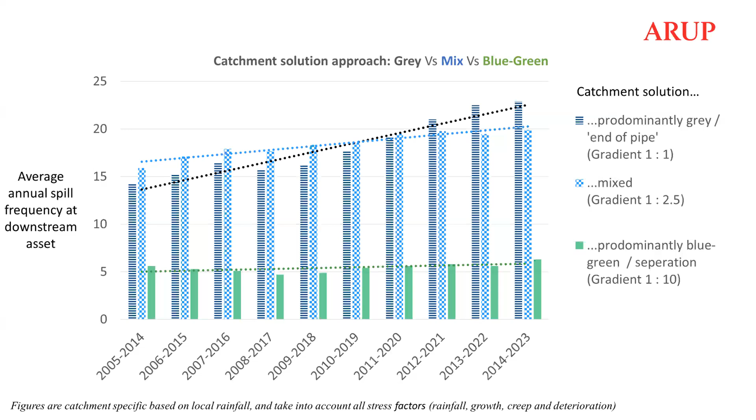The first is maintenance. It's currently incredibly difficult for local authorities to retain funding for maintenance with significant other pressures on public spending. In Grangetown, maintenance has not been routine. In fact, to my knowledge, there's been just one maintenance activity in the past 6 years. I do see the positive on the one hand, as it's performing very well. And the community has stepped up as well, as I discussed with some of you today, and they're actually helping to maintain some of the green features, which is a massive positive. Perhaps going forward, we need to consider other options for maintenance. This might include things like private finance, private nature finance, and also getting the community involved as well. And the CIRIA tool might help in backing this approach up.

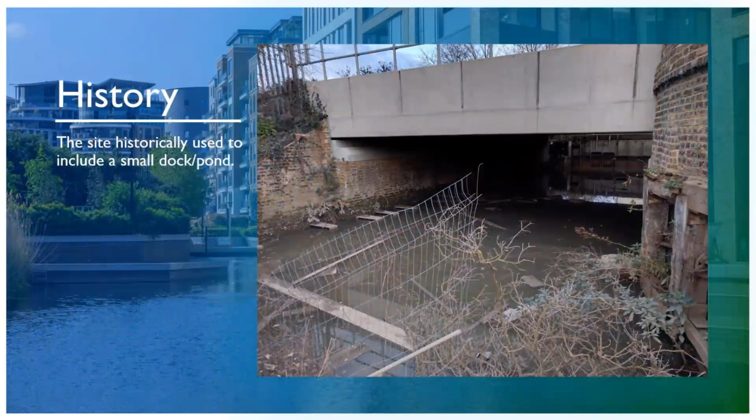Our vision for Chelsea Creek was to connect the site to water by expanding the dock and providing canals to create a vibrant new waterside destination. Looking to Amsterdam and Copenhagen, we have brought a characteristically European feel of waterside living to London. Historically, the northern corner of the site used to include a small pond. This has been extended into a larger basin and marina with 2 canals running from it.

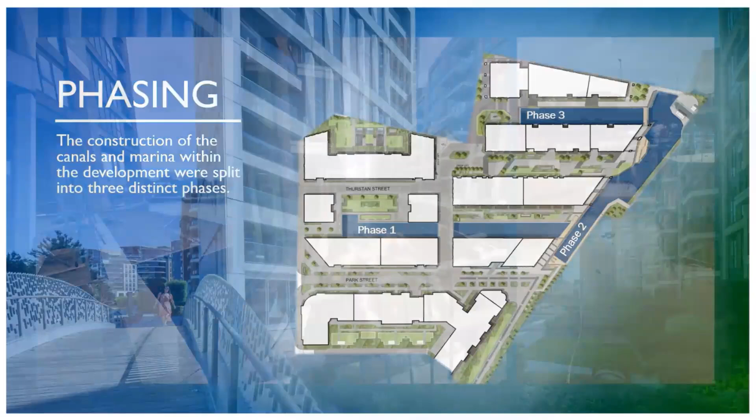The construction of the canals and marina within the new development was split into 3 distinct phases. These new features were constructed as a continuous concrete structure. In order to not place pressure on the local network, the canal has also been designed and constructed to act as an attenuation tank holding stormwater. In addition to this, the feature also serves as a place for nature and community to thrive.

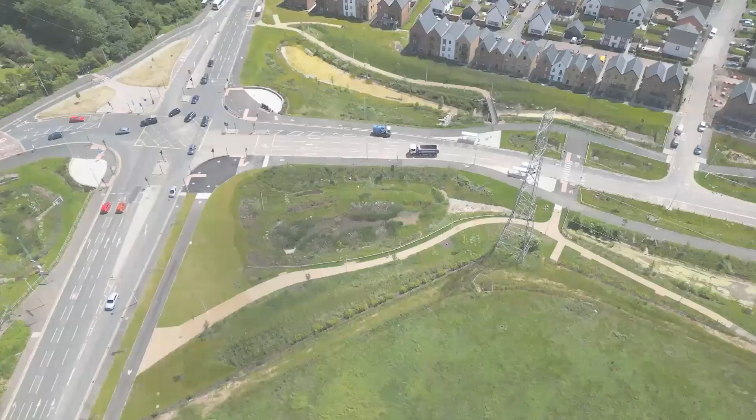Plasdŵr's Gateway Linear Park is an active travel, landscaping and sustainable drainage focused highway link into Wales's largest residential development. The wider Plasdŵr site will provide 7,000 homes, 5 schools, amenities and 400 acres of green spaces over the next few decades. The Gateway Linear Park is a landmark entrance into that development, designed to capture the ethos and design principles of this 21st century garden city.

Working collaboratively from the outset, the project aimed to combine safe active travel with the desire to create a destination and the need to sustainably manage surface water runoff. These principles were at the forefront of the design, a stark contrast to the traditional car-centric, narrow footpath, hard-engineered highways of the past. The design was also carefully coordinated with existing strategic utilities, including high-voltage cabling, a trunk potable water main, and a high-pressure gas main.

Surface water runoff is collected in swales with check dams to slow the water down, allowing sediment to settle, and carefully selected planting to strip hydrocarbons and metals from the polluted runoff. Runoff is then attenuated in landscape ponds, reducing flood risk within the development and in the downstream drainage network.

The SuDS components are closely integrated with footpaths, cycle routes and play equipment, as well as providing a natural separation from car traffic, improving safety and experience.

The project introduced 140 trees, 2,400 metres squared of permanent water, varied aquatic and non-aquatic planting, and large amounts of wildflower meadow planting. Biodiversity benefits can be seen firsthand with the new species already present on site, including nesting birds and invertebrates. 70% of Gateway Linear Park is blue and green landscaping, a completely different approach to traditional highway design.

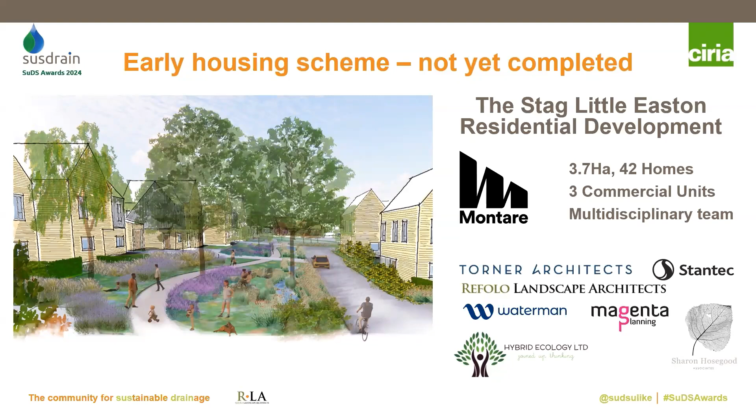Right from the start, the client engaged a multidisciplinary team including Torner Architects, Magenta Planning, Stantec as drainage engineers, Hybrid Ecology, Waterman as highway engineers, Sharon Hosegood Associates as arboriculturalists, and ourselves as landscape architects. Utilising a multidisciplinary approach guarantees that the design harmoniously blends in with its surroundings.

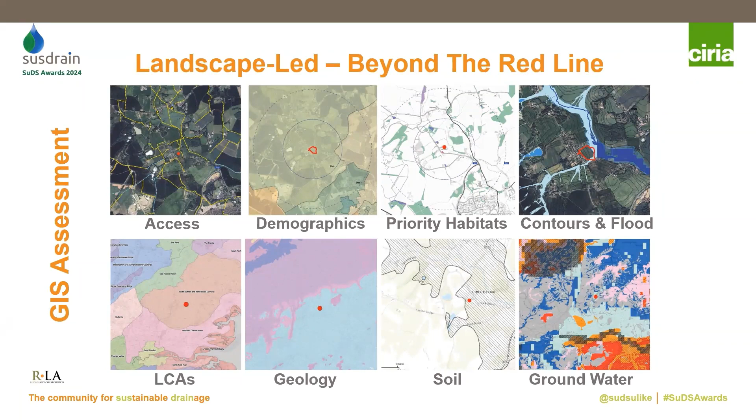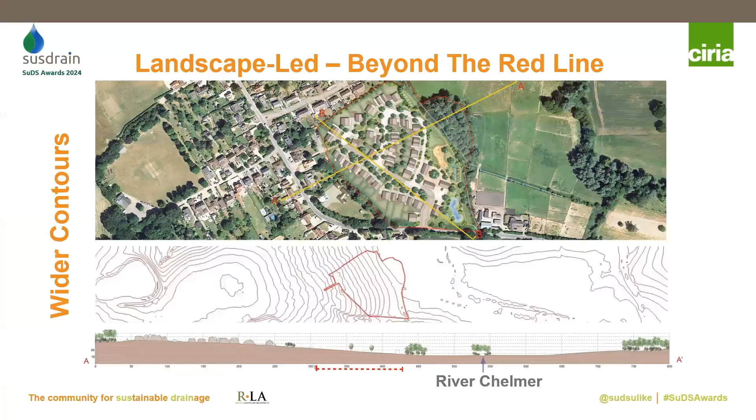By applying that wider landscape approach, the initial assessment of the scheme consists of a desktop GIS analysis where key aspects of the site within and beyond the red boundary were captured and overlaid. This provided the initial design input for the scheme. Wider land contours assessment and long site sections provided key information in relation to the surrounding hydrology and the River Chelmer and other relevant water features.

The design within the site boundary then evolved, taking into consideration the land aspects as well as the complex architectural requirements for the homes. Through various interdisciplinary design iterations, the green and blue infrastructure was seamlessly integrated with the social infrastructure and architectural ethos for the scheme, creating a place for people and wildlife to call home.

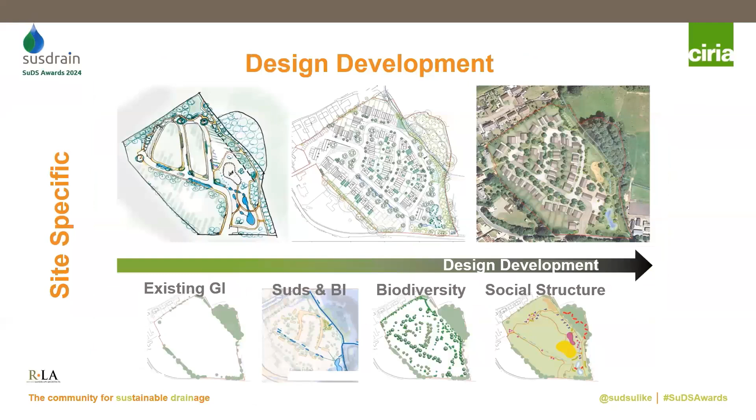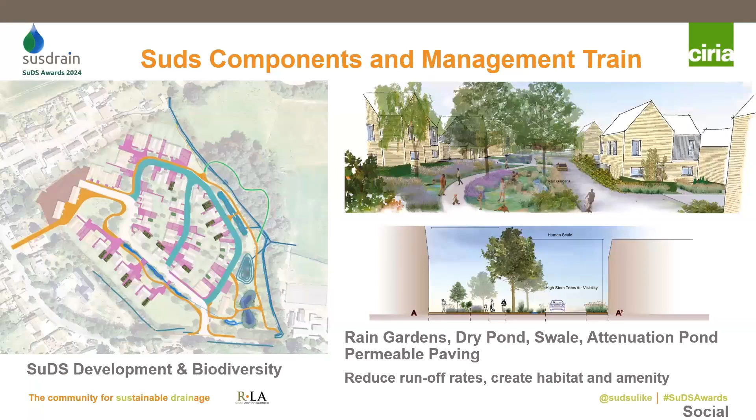The design was nature-based SuDS-led from the early conceptual stage, allowing for the creation of various SuDS components arranged in a conveyance management train. By considering the broader context beyond the red line, including hydrological factors, human and wildlife movements, as well as nearby townscape architectural styles, the design approach successfully reconnected the site with its surrounding landscape. This addressed the 4 pillars of SuDS by reducing runoff rates, improving water quality, creating amenity and biodiversity.

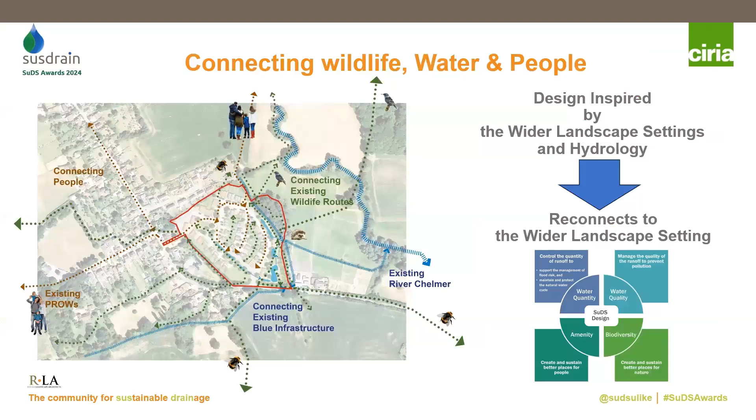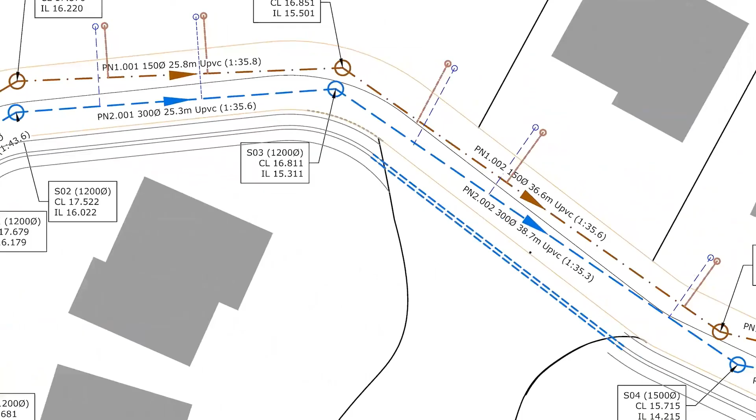Wellbank Park is a vibrant new community on the edge of the Lake District, planned with people, landscape and the environment at its heart. Initially, the drainage was conventional, with surface water dispatched into deep drains under the roads. These were linked to buried cellular attenuation tanks, and these would result in equally deep ponds at the bottom of the site. But the client, David Nuttall, had a vision for a more sustainable approach and brought 2B Landscape Consultancy and consulting engineers PSA Design onto the team.

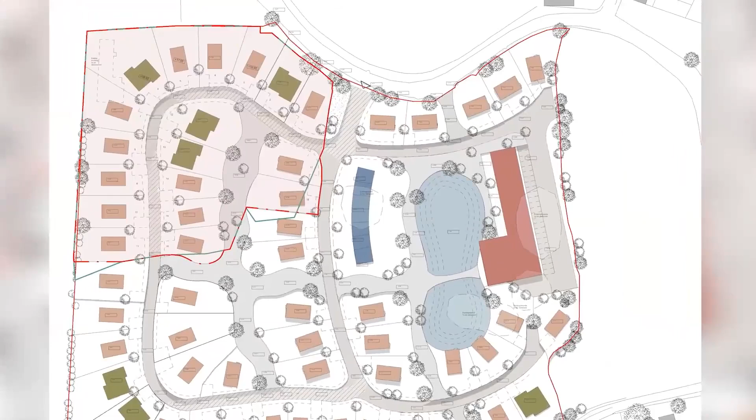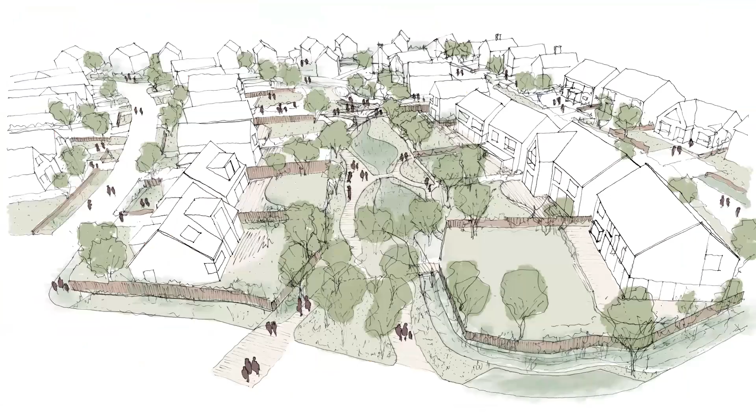The basic master plan layout had already been conceived by the architect. The strong emphasis on landscape corridors and spaces designed to provide walking routes around the site gave us a framework into which we could overlay a more sustainable approach to surface water management. The swales add interest and purpose to the landscape routes through the site and use the natural terrain to deliver the water at a controlled rate into 2 large ponds.

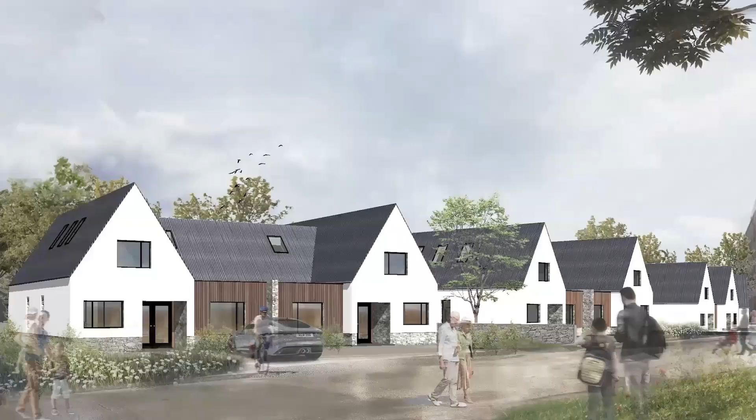The house plots are drained to permeable sub-base drives to detain the roof water. The access roads are a conventional non-permeable design, but surface water is kept as high as possible and crosses the roads using shallow drainage units which feed into the downstream swales. The swales also take the crossfall from the access roads.

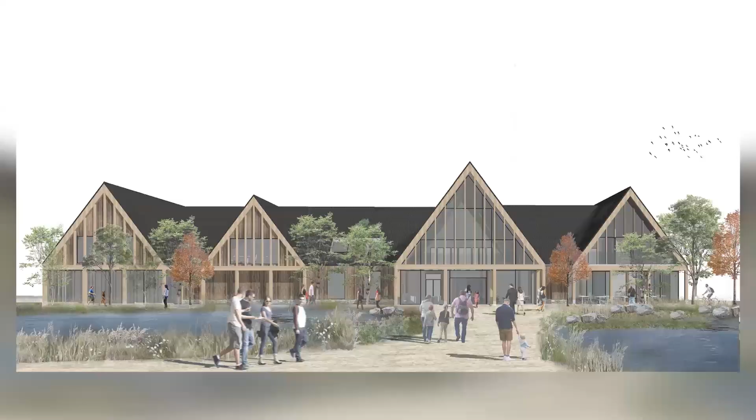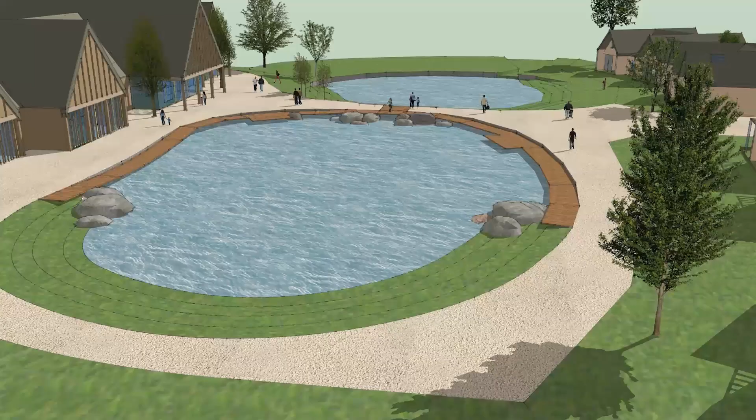The ponds provide a fabulous setting for the community hub. They're designed with a wet bench for normal levels and a dry bench for the peak water level, which is 300 mil higher. These benches provide flat areas which enhance both safety and biodiversity. The project is under construction now, with the layout of the ponds and landscape corridor visible and the first of the swales being formed. We look forward to seeing the site develop and to its vision being achieved.

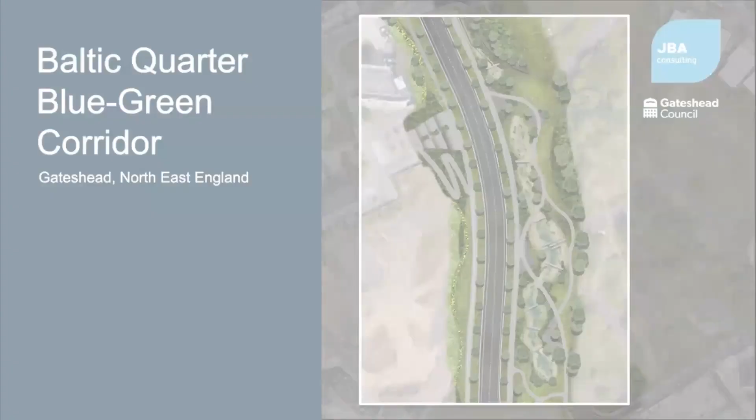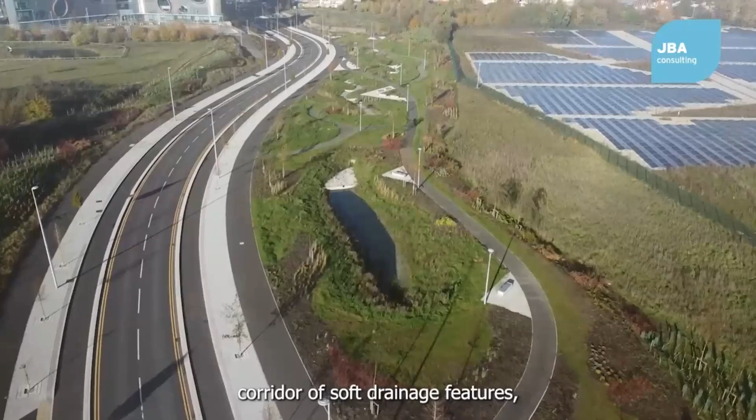Hi, I'm Helen Smith and I'm a Technical Director in Landscape Architecture at JBA, and I was lucky enough to be the lead on the design for the Gateshead Baltic Quarter blue-green corridor, which you can see me standing within now. JBA worked in partnership with Gateshead Council to design a climate resilient blue-green corridor to take surface water and provide future surface water attenuation. The project was about creating a multifunctional green corridor of soft drainage features with sustainable urban drainage capacity that also provided pedestrian and cyclist links through the site, recreational space within a linear park area, and biodiversity net gains. Gateshead's aim was to have an exemplar SuDS scheme within the borough that could be used as an example for future SuDS elsewhere.

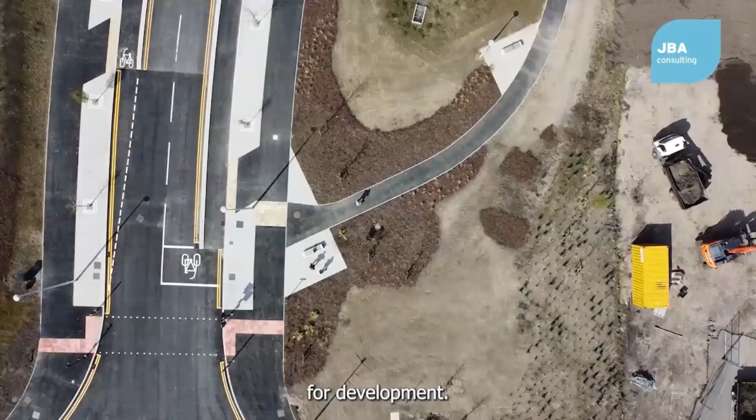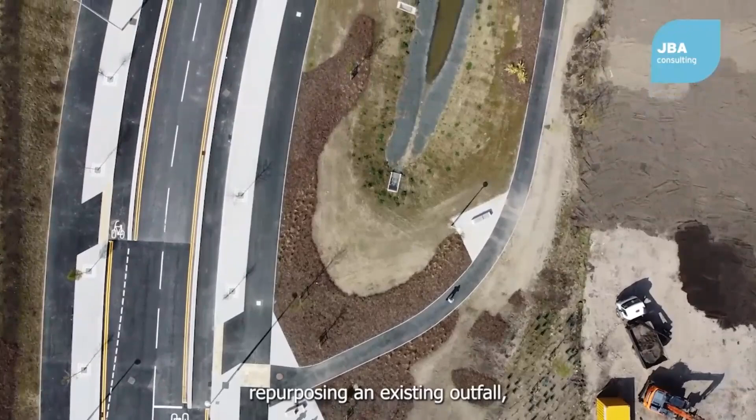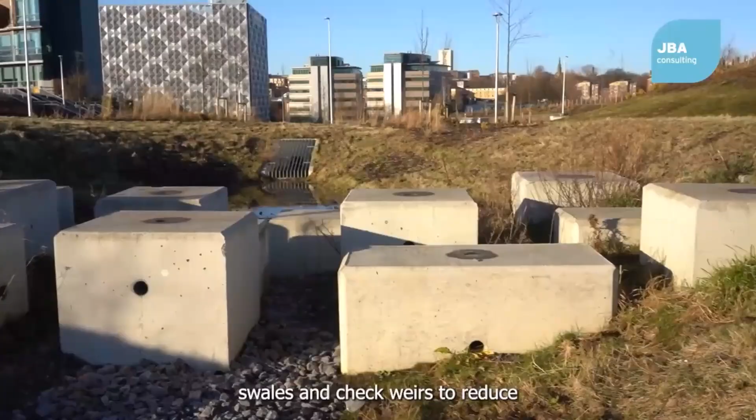Where we're standing now is a former industrial area. There was a road here, but the rest of this area was quite heavily contaminated and the land has been reclaimed for development. A fundamental objective was to transport surface water to the River Tyne. Our engineers used 3D surveys to navigate to the river, repurposing an existing outfall, providing time and cost efficiencies. We worked with Gateshead Council to maximise the sustainable drainage potential, creating attenuation areas, rain gardens, swales and check weirs to reduce flow rates during peak events. By modelling the green-blue network, we could predict and design for future capacity needs.

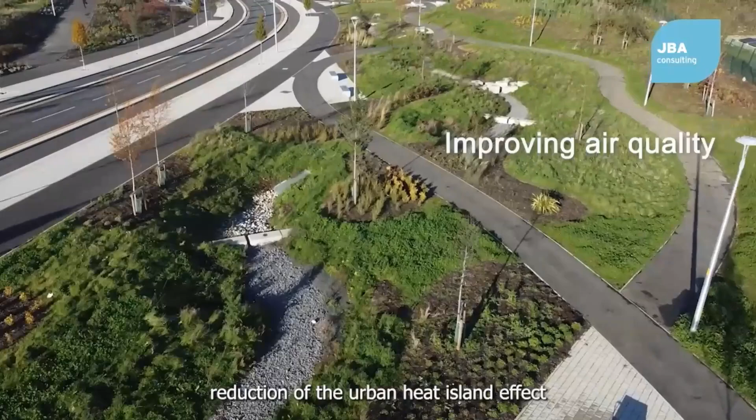The planting design includes street trees, shrub and herbaceous planting, and provides benefits in terms of air quality, reduction of the urban heat island effect, and provision of wildlife habitat. The site is both a gathering space and a transport link, and the intersecting landscape elements reflect the cultural and industrial heritage of the site, including historic rope making that is part of its history.

Lisvane and Llanishen Reservoirs is a new water sports and visitor centre owned and operated by Welsh Water. It serves as a hub for health and well-being in North Cardiff for both visitors and the local community. The centre includes a cafe, water sports facilities and meeting rooms, while the external landscape provides amenity spaces, educational areas and parking. The project restored a previously brownfield area of operational land associated with the historic use of the reservoirs. It forms part of the wider restoration project undertaken by Welsh Water since they acquired the reservoirs in 2016.

The SuDS scheme had to be carefully integrated around extensive infrastructure, including the reservoir dams, various listed structures and live operational elements. The site also encompasses 2 SSSI designations and various SINC designations. The design team included Momentum Civil and Structural Engineers, Landscape Architects LT Studio, Architects Feilden Clegg Bradley Studios, and Services Consultants E3, working closely with the client Welsh Water. We aimed to develop a SuDS scheme that was highly expressive, educational and carefully embedded into the wider landscape. The scheme also helps to reconnect the richly biodiverse reservoirs with the adjacent watercourse and surrounding woodlands.

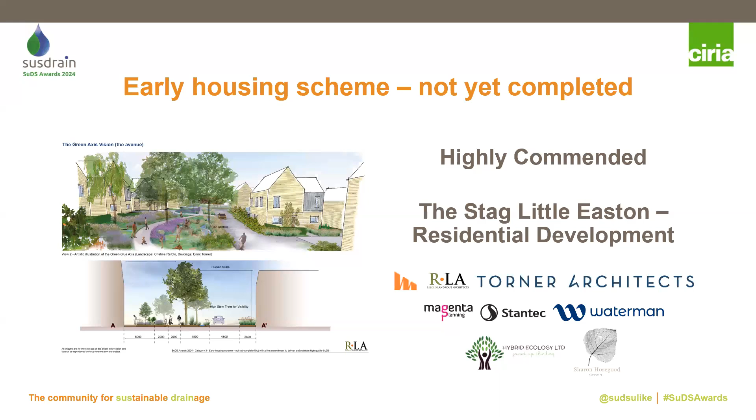The judges' comments: a fascinating project, bringing to life an old reservoir, creating a vibrant space for local communities, all encompassing SuDS features. So very well done. If you want to say a few words, be my guest.

Just to say thanks. Obviously, it was a large collaborative effort and took a lot of work between the engineers, landscape architects, and a great client, Welsh Water, who were really keen to develop the reservoirs and have created a truly impressive space. Also, one of the first or an early project to go through SAB, so thank you to SAB as well. It was a sort of learning experience for everyone, I think, to get the projects through that process.

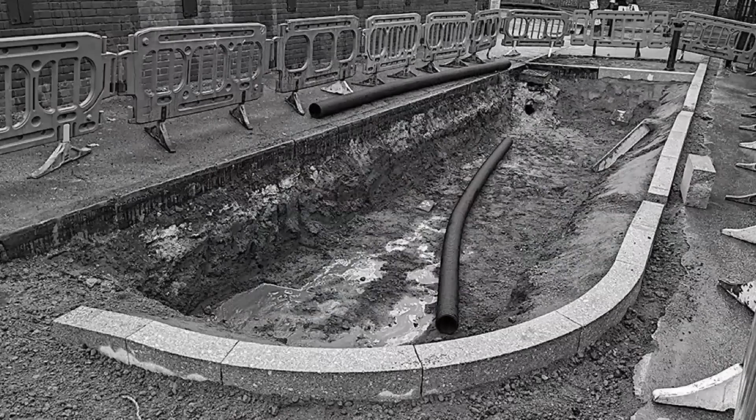Benefits, and obviously the biodiversity and flood risk benefits are a given, but I think it's really crucial to understand the wider societal benefits, like how community projects can really help improve cohesion, create safer and better neighbourhoods. And I think that's the brilliant thing that investment into SuDS and green infrastructure can bring. Back in 1997, the St John Society was formed by saving the local duck pond. From there we've been focused on understanding how we can improve the greening areas within St John's, but also the lake.

It's been brilliant supporting the St John Society delivering this project. As soon as they came to us with the idea of trying to convert an underutilised bit of footway road surface on an underused road, Lewisham Council were really supportive of the project and wanted to do all we could to facilitate the St John's community delivering it. The next stage for us will be working with Network Rail on the mural on this wall here.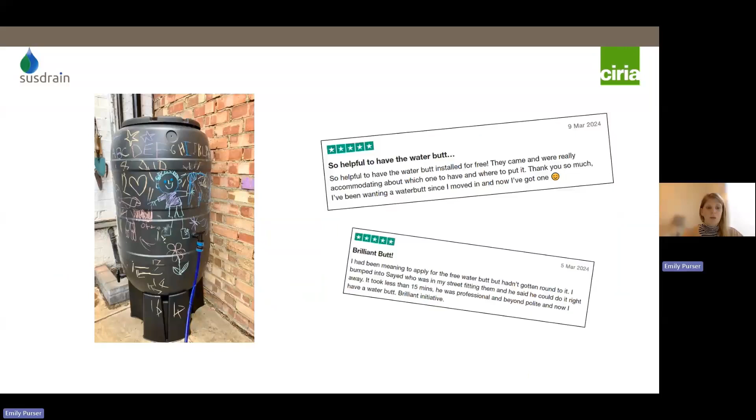As well as that word of mouth, we also delivered an informative postcard so that people could understand what the project was aiming to do, and also that each individual water butt was really part of a bigger overall project that was going to make a real difference in the flood risk of the area. We received some really positive feedback, and I think it really showed that a collective action approach could build trust and momentum and really helped deliver the success of the project across those areas, and also help create a more resilient and flood-aware community.

We're hoping to take the learnings and success of this project and expand it to other parts of the borough, and perhaps work with other boroughs to expand across London. We'd really also like to thank our external partners, including the National Flood Forum and Thames Water, who also helped to deliver this project successfully.

Hi, I'm Elizabeth. And I'm Bill. And we're the directors of 2B Landscape Consultancy. This is our home. And this is our office.

As we've developed, repaired and replaced various parts of our house, office and garden, we've taken every opportunity to incorporate water collection and attenuation features. We've done this by fitting 4 water butts, 4 green roofs, a hydration channel, a rill, pond and rain garden, a permeable drive and deck. And we've shared this with our neighbours during open gardens.

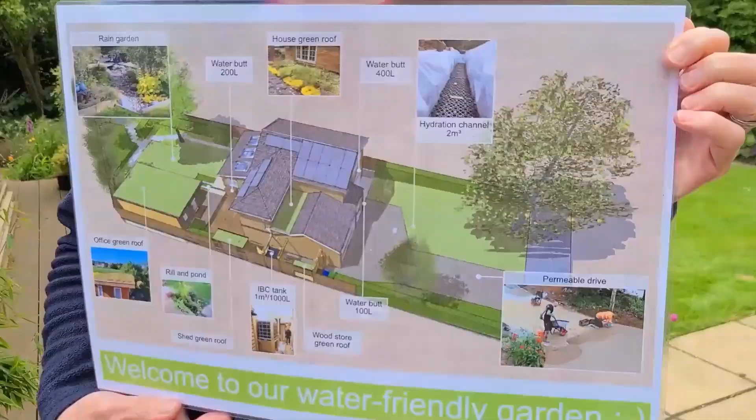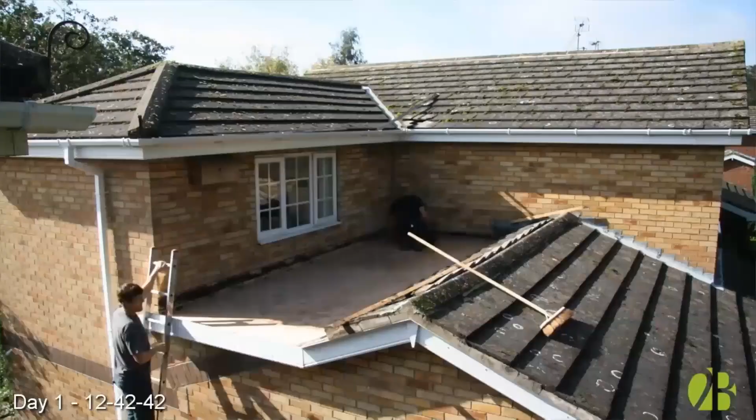To keep the water clean, all of our water butts feature these ingenious water diverters and filters. It's amazing how much stuff comes off the roof. Our first green roof was in 2010 when our garage flat roof had to be replaced. We produced a time-lapse video of its creation.

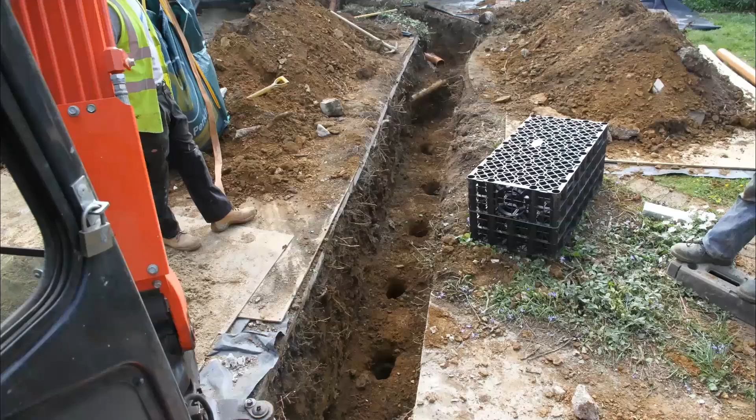We then fitted a green roof to our outside office and also to a shed and a wood store. It's fascinating to see how these change through the years and how they always come back after summer droughts. The hydration channel was fitted by our house insurers when we put our foot down and said we didn't want the large ash tree in our front garden removing. The channel provides all the moisture that the tree needs without it sending its roots under our house.

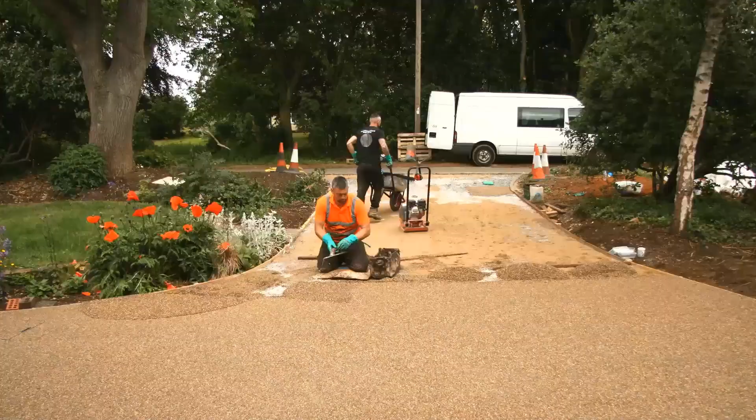When we fitted an extension, we had the chance to redirect the water from the entire back of the house, which runs through a rill, a pond and into a rain garden. The exceedance route is via the overflow and dry stream bed, which outfalls to a local ditch. We laid flexi-stone permeable bound gravel on top of Type 3 stone.

We've done as much as we can to collect and detain the water that falls on our property. Ironically, that didn't help us much when we were flooded by surface water from adjacent fields in 2019. But it did make us move on to our next SuDS NFM adventure, the West Wales Slow the Flow Catchment Partnership. When it comes to SuDS, all scales matter.

In July 2022, we embarked on an ambitious project aiming to complete a community rollout of passive draining water butt planters on residential properties across 3 communities in an urban and rural setting. The project explored ways of encouraging residential communities to adopt rainwater capture to help slow the flow of rainwater entering sewers, engaging residents to be part of the solution to help reduce CSOs and surface water flooding. The project was part funded by Thames Water and Ofwat's Water Breakthrough Challenge.

The project deployed Thames Water's own specially designed water butt, which has a unique 2-tank design. A small internal tank which retains some water for reuse, and a larger 235-litre tank with a low-maintenance flow restrictor that provides the passive stormwater storage without the risk of blocking, and ensures storage is available the next time it rains. The water butts have planting trays on top, which residents use to plant flowers, fruit or vegetables, increasing the biodiversity and enhancing the amenity of their neighbourhoods.

The scheme leveraged digital innovation by using an online platform to facilitate the free uptake of water butts. Householders were encouraged to register their interest on the platform and then schedule an installation at a time that suited them. A combination of digital-only and in-person community engagement approaches were used to raise awareness of the water butt scheme, and these were tailored to the specific communities and their needs. The use of a digital platform provided a streamlined onboarding experience for householders by leveraging technology to simplify and enhance the process.

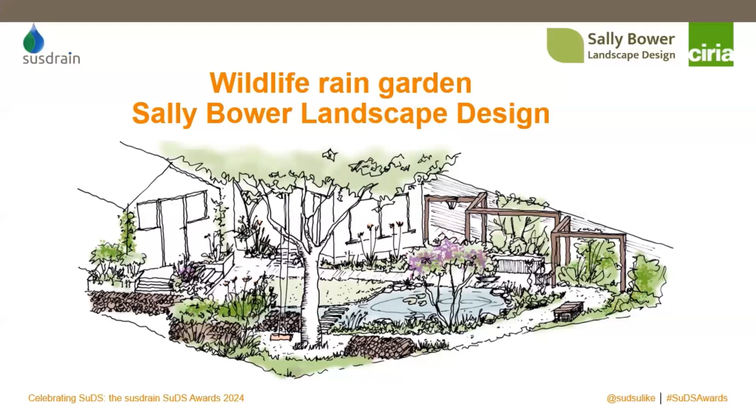In my design, I placed the pond at the heart of the garden. One thing I noticed during my site analysis was the roof drained directly onto the ground, and the soil was sandy, loam and free draining. To me, this was a brilliant opportunity to create biodiverse SuDS as an integral part of the garden and to feed the pond.

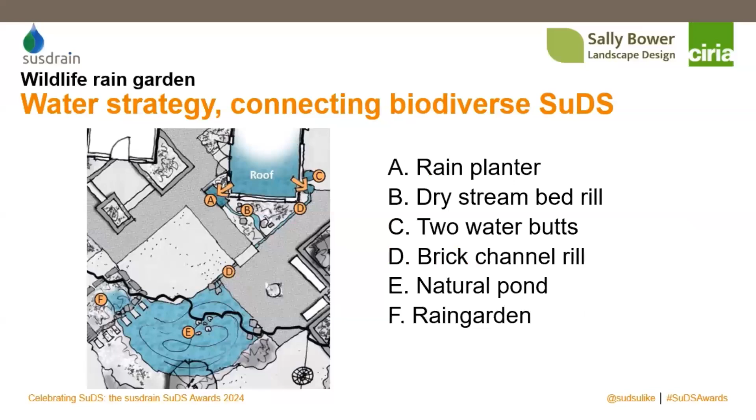Briefly, the rainwater fills either a rain planter or water butts. These overflow into rills, which feed the pond. When there's heavy rain and the pond is full, it overflows into the rain garden. The next few slides show these elements.

Starting with the rain planter, which is a galvanized trough, this overflows into a dry stream bed which snakes through the planting. That leads to a brick channel rill. The brick channel also takes overflow from the water butts on the other side of the roof. The channel flows into the pond.

The pond has lots of variation in depth and varied edges for wildlife, including dead wood in log piles and perch points. The overflow is at the other end of the pond, going into a rain garden. There are even resident toads under the logs. The clients love their garden, particularly the pond with lots of wildlife.

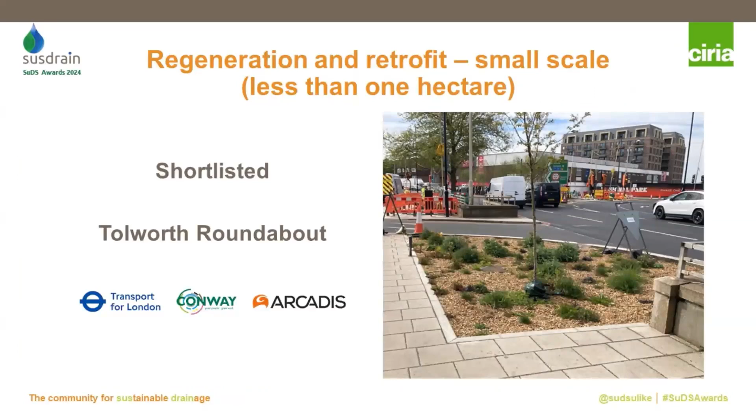I'm Alessandro Ficara. I work as a senior engineer in the TfL pumps and drainage team. On this scheme I was the main designer. My first instinct was to try to find locations where SuDS would work and we could intercept some of the impermeable catchment. We identified 6 locations for rain gardens and another 5 locations for permeable paving. And we proposed some tree pits, some swale, some dry ditch.

So this scheme really showcases the innovative way in which TfL has been able to deliver SuDS. It's quite a challenging, urban, complex highway location, so we had to really make use of the space. We had to reuse some outdated subway, for example. And you can see here at the roundabout, we really had to transform this roundabout into a biodiverse water management landscape. SuDS on highway locations are very challenging. The constraints are considerable, but as we try to look at things, constraints are opportunities.

It was particularly exciting from my point of view because I thought we could get a really interesting range of planting in. One of our aims at TfL is to get people to walk and cycle more. And of course, if your routes are interesting, green, things in flower, lots to look at, then they're more likely to do that.

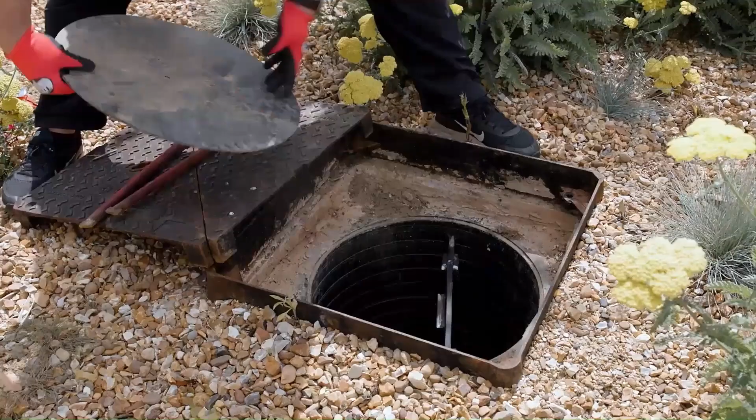This is one of our first big SuDS schemes in London. So we are learning and forming long-term relationships with our partners so we can start delivering more of those types of SuDS schemes in London in the years to come. This project definitely formed the basis for developing new TfL SuDS standards. We are really proud of this scheme and we really learned a lot from it.

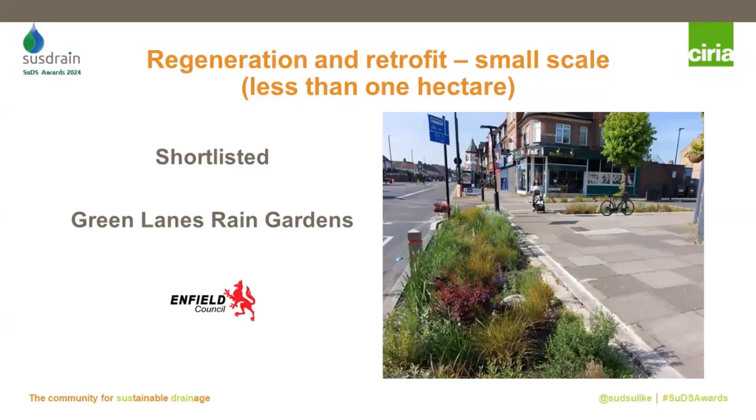The Green Lanes Rain Garden project was delivered by engineers and landscape architects from Enfield Council in collaboration with Thames Water and the Environment Agency. The rain garden SuDS features were constructed by excavating the footway, backfilling with granular subbase, topsoil and then planting. This area of Green Lanes in the southwest of the borough is at significant surface water flood risk as it's a topographical low point and surface water frequently overwhelms the local drainage system.

The rain gardens help to alleviate flood risk by attenuating road runoff and storing it in the subbase before discharging back to the sewer network at a reduced rate. Also, losses occur through infiltration to the surrounding ground. The rain gardens also help to improve local water quality by filtering out pollutants through the subbase, ensuring that water entering the local river system is much cleaner than what enters the rain garden. Finally, the rain gardens help to improve the street scene by providing much needed green features to a predominantly grey space.

To summarise, this scheme has helped improve the local area by reducing flood risk, improving water quality, and importantly providing exciting green infrastructure to a grey landscape and encouraging more people to visit the area and enjoy the local offerings.

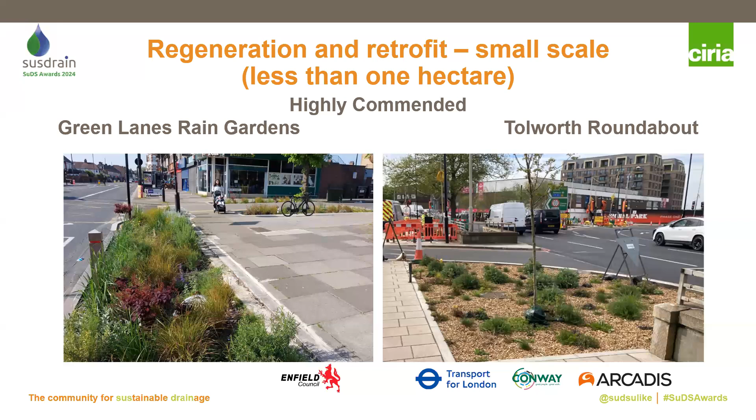Okay, we are moving on again to the final block of categories. This is the third block we've got. The following categories: regeneration and retrofit in public buildings, regeneration and retrofit large scale, and also catchment-based SuDS solutions. So we've got another 5 videos in this block of categories, which again, all being well, should play now. And try to sort the volume.

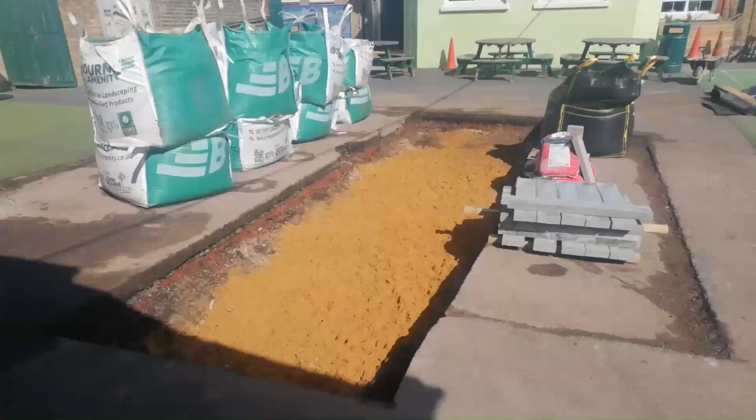London Borough of Lewisham and its schools, in partnership with Trees for Cities, have embarked on an exciting new programme to adapt vulnerable urban school playgrounds to the changing climate through the installation of SuDS and nature-based solutions to help manage climatic risk at these schools. This phase of the programme was at Rathfern Primary School, Deptford Park Primary School and John Stainer. The project has really helped to transform the playgrounds, reducing surface water flood risk, increasing their adaptation to the changing climate, but also creating biodiversity in environments void of it, and improving the awareness and knowledge of climate change within the school community, and creating deeper connections to nature, and instilling a motivation to help protect and promote nature and the environment within the school pupils.

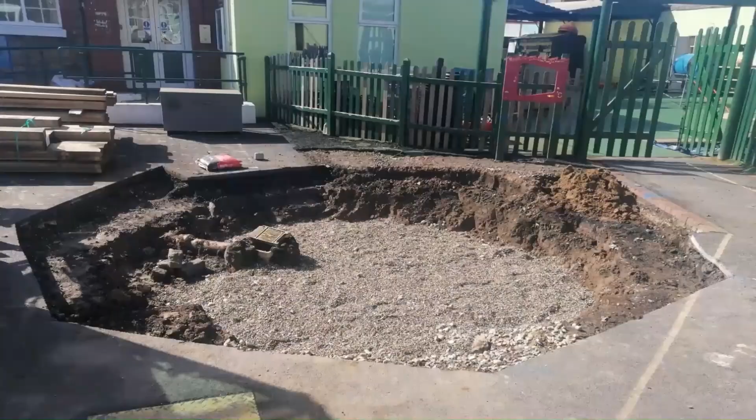So in this particular school, the playground flooded quite a bit. Every time there was a heavy rainfall, there were certain areas of the playground that were just inaccessible to the children. They couldn't make any use of it. So the idea was to make sure that we could mitigate that. We could put in rain gardens, like the one I'm sitting beside, put in downpipe planters, and also tree pits. In a lot of the schools we work with, they don't have any trees, it's just a sea of tarmac. So here the concrete was cut out so that trees could be planted. We really do believe quite strongly that children appreciate nature if they can get a bit closer to it. And if all they ever see in their playground is tarmac, then they're not going to appreciate those little creatures that are crawling around.

The SuDS project has opened the doors to new learning and new opportunities for the children. Our school is based in a flood-prone area. With that, they've seen how members of the SuDS team have come in and helped them to understand that this water, instead of creating a flooded area, can be drained in a more sustainable way. So we're quite pleased to have that in our playground and to be a part of the project.

The William Austin Junior SuDS in Schools project was a partnership project delivered in conjunction with Thames Water and the Department for Education that jointly paid for the project, Luton Borough Council, the Environment Agency and William Austin School itself.

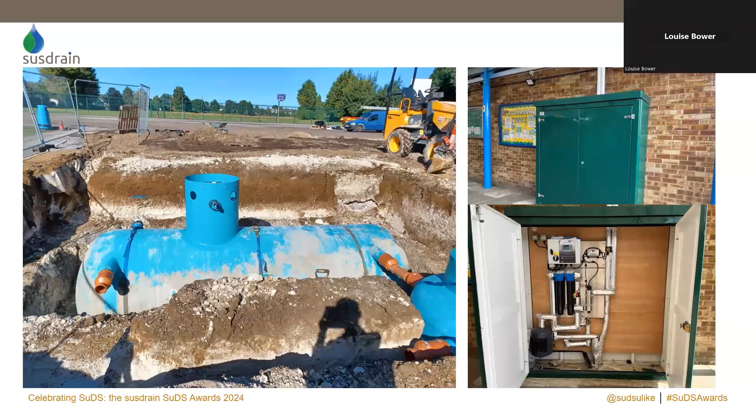The school had flooded several times over, mainly due to overwhelmed drainage and an entrance at the bottom of a slope. The largest intervention on this site was the rainwater harvesting tank that drains an area of 500 metres squared of roof. It can hold 12,000 litres of water and is used to flush a toilet block at one end of the school with 14 toilets. A kiosk was installed to allow for data collection and monitoring.

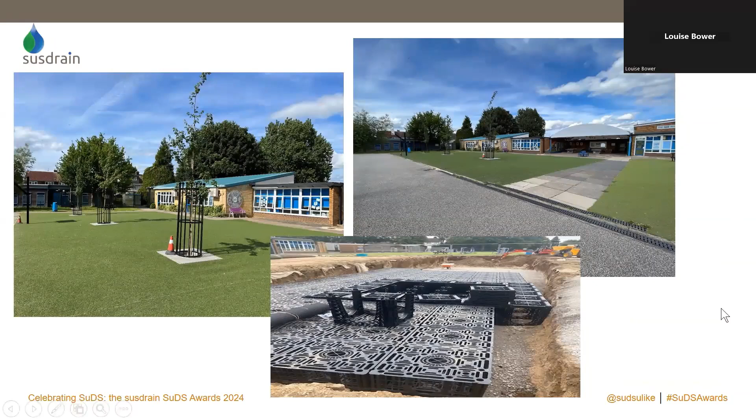This is the school playground after the construction was completed. You can see 3 tree pits, inspection chamber, and underneath this astroturf is the rainwater harvesting tank. As well as the tree pits, there is a series of crates. They can hold 53,000 litres of water. The water flows off of the playground into the tree pits and aqua drain and is stored in the crates before being released slowly back into the soil. This allows for less water getting into the surface water drainage network.

In addition, there were 6 planters installed on 3 outbuildings at the school. The roofs drain through the downpipes into the planters that can hold 2,000 litres of water each. They're planted up with a range of herbs which were chosen by the school to be non-toxic to the students. Beyond the construction, an assembly was held to educate the children about the SuDS on their school campus, and additional information was left with the school for them to use in the future.

Enfield Council have transformed a historically underutilised park in the southern part of the borough into a stunning wetland with access to a rare natural section of the Pymmes Brook. Previously, the park was mainly used as a shortcut for crossing the A406 rather than as a recreational space. The landscape was primarily grassland with a small hill to the east and some natural play features. The Pymmes Brook, which flows through the northern section of the park, was obscured by a palisade fence and situated 3 metres lower than the surrounding land, making it completely inaccessible. The park was particularly unusable during the winter months due to waterlogging.

The site is also of archaeological significance, likely being part of the historic Weir Hall estate. During the works, we found evidence of an old pig farm and some Ice Age tundra and petrified wood. Wilbury Way was identified as a pivotal site for mitigating flood risk within the Pymmes Brook catchment. The wetlands are fed by diverting a surface water sewer and newly installed land drains into a series of wetland cells. These cells rely on infiltration but also have an overflow back into the Pymmes Brook. A bunded footpath also provides additional flood storage during large rainfall events.

The wetlands have been planted up with various wetland plants which will help slow the flow and reduce pollutants in the water before it flows back into the brook. A 40-metre section of the Pymmes Brook has now been opened up. It's now accessible from the park and helps people see a rare natural section of the brook. Many residents have commented on how they weren't even aware a river was there before.

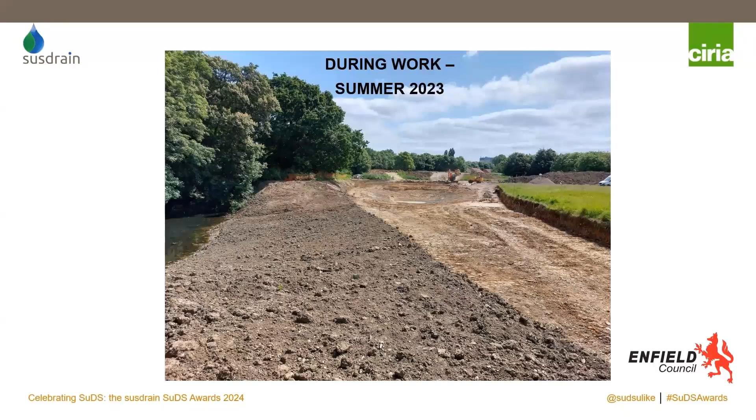We formalised informal footpaths to give residents better access around the park, created a large hibernaculum buried on the hillside next to the wetlands and used reclaimed stones found during the works for seating. A well-attended community planting event saw the wetland ponds filled with native wetland and marginal plants. A wildflower meadow was sown along with shrub and tree planting which will help blend the space into the rest of the park. Future plans for the park include installing PIR solar lighting along the main footpath, natural play equipment, and to improve access links by creating a woodland walk north of the river linking back into the park.

The Flood Mitigation and Community Flood Resilience in Waltham Forest project has been a collaboration between several different council teams, including the Climate Emergency Team, the Lead Local Flood Authority, Highways and Parks, as well as external partners, including National Flood Forum, Thames Water and local flood action groups, which are made up of local residents. This joint working has been key to the success of the project by integrating flood mitigation schemes with climate change benefits and also combining resources. We've been able to deliver shared goals to maximise outputs.

The flood mitigation strategy covers the whole borough with various sites across 7 critical drainage areas. And the combined approach of different schemes has included constructed wetlands, swales, basins, transforming local roads with SuDS, and also household direct action.

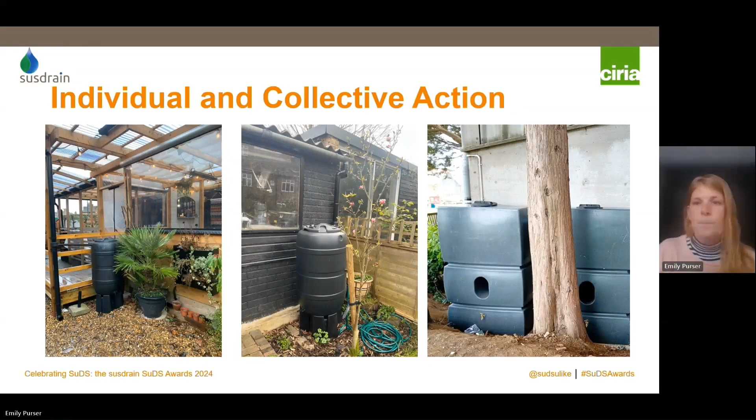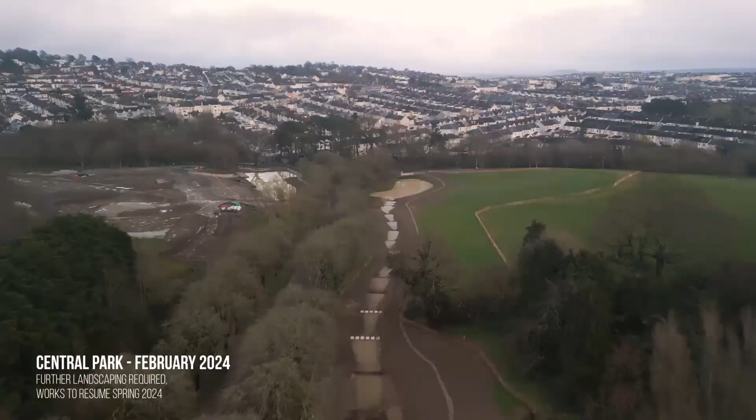The Central Park Sustainable Drainage System scheme in Plymouth incorporated a variety of drainage improvement works in order to capture rainwater and contain it. This maintains a natural environment for wildlife and simultaneously encourages biodiversity. The objective was to transform water from a problem into a resource for the local community and for wildlife existing in the area. Flooding issues were intensified in times of heavy rain, and with the impending threat of climate change, this is only forecast to increase in the coming years.

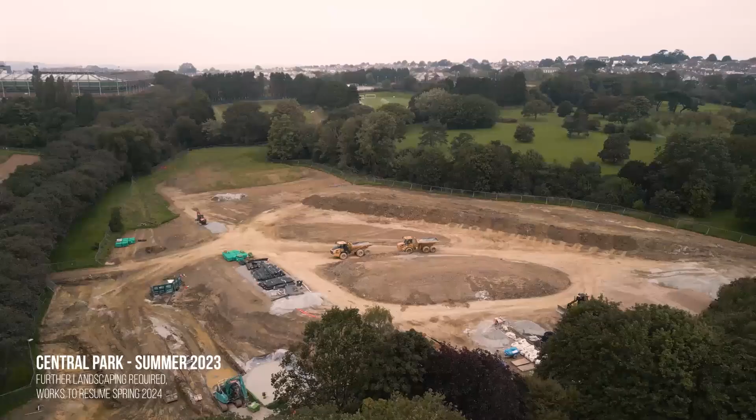One of the integral constraints faced during this scheme has been management of existing trees and plants, some of which were protected. Considerations into the geographical layout was of primary importance. Pond installation is an effective and efficient method of combating flooding. The ponds were excavated into existing embankments which required retaining wall installation. Tens of thousands of cubic metres of earth were moved as part of the cut and fill process to enable

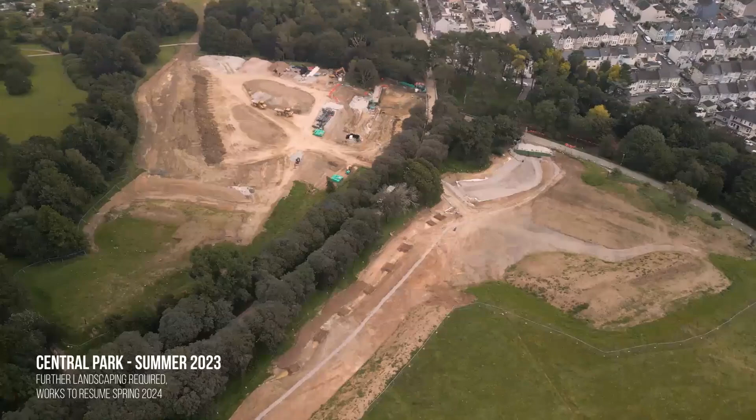the pond's successful completion. The retaining walls are a proprietary root lock system installed in small bags stacked on top of each other, which interlock initially, but after time, the living element comes into play, where roots and vegetation take hold to provide additional stability. Little to no maintenance is required for this system, making it an environmentally sound initiative that has seen great success with this project and adheres to our environmentally friendly objectives.

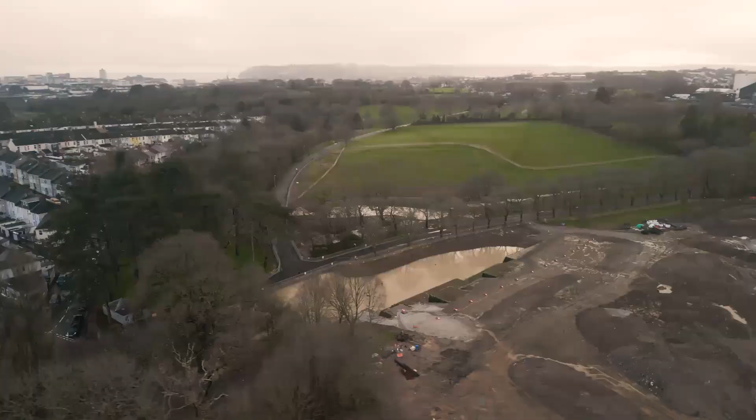The Central Park SuDS project contributes to a greener future, aids carbon efficiency and improves potential for wildlife development. The environmental achievements of the scheme include an increase in biodiversity, it has provided natural habitat for existing fauna and attracted new wildlife to the area. The entire project has been a focus on environmental sustainability, and we are proud to have delivered such a successful scheme in the heart of Plymouth.

Okay, brilliant. 5 more fantastic projects in 3 more categories. Okay, so moving on to the award winners. The awards category we're going to deal with first is regeneration and retrofit for public buildings. And I am delighted to announce... nothing. The winner is SuDS in Schools, the William Austin Junior School in Luton. Very, very well done.

Yeah, Louise, come up and say a few words, and in the meantime, I'll just read out the judges' comments. The judges' comments included: loved the different approach to SuDS for schools, with serious incorporation of water reuse, more than just the usual water butts and planters. Great to hear the positive feedback from the teachers of how it's working. And the project will provide good learning for future generations. So it's really about passing it on. Louise, very welcome to say a few words.